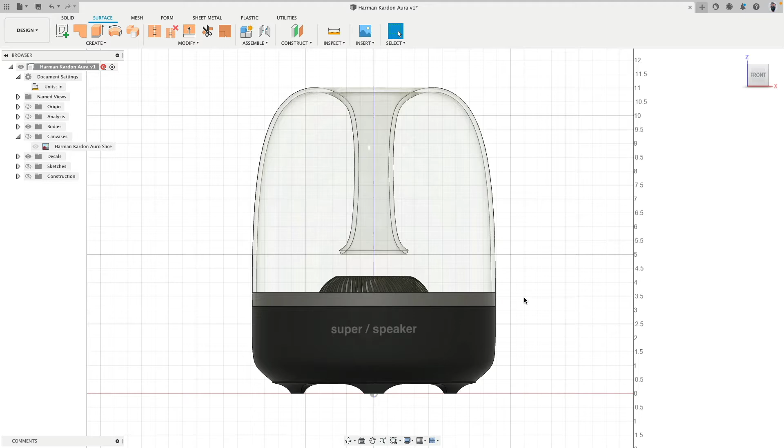Hello everybody, and welcome to this amazing exercise in which we're going to create this super speaker Wi-Fi speaker. What's going to be interesting in this lecture is how we're creating just a concept model.

Concept model, what does that mean? Here, there's nothing inside, it's just a paper model. Everything we create here is kind of like a sketch on paper, just an idea of the shape without all the interior stuff in it.

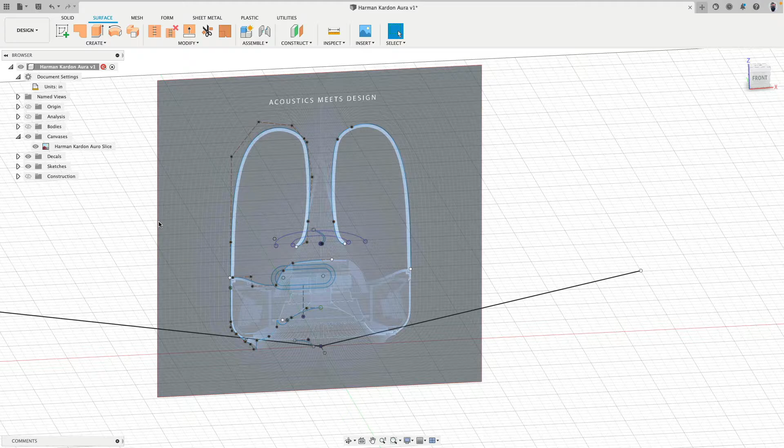The way we will start and work is by bringing in first a canvas, scaling it, creating then just only the sketches we need. And then I will show you an interesting mix of surface and solid modeling techniques to create all the details we have here. For example, this stuff here in the center looks highly detailed.

That's actually easy peasy kindergarten stuff. My 5-year-old could do this. Okay, so with all that said, let's do it.

So we start with a new scene. Also here, right click, turn off the design history. Millimeters we keep, very good. And then let's go to canvas.

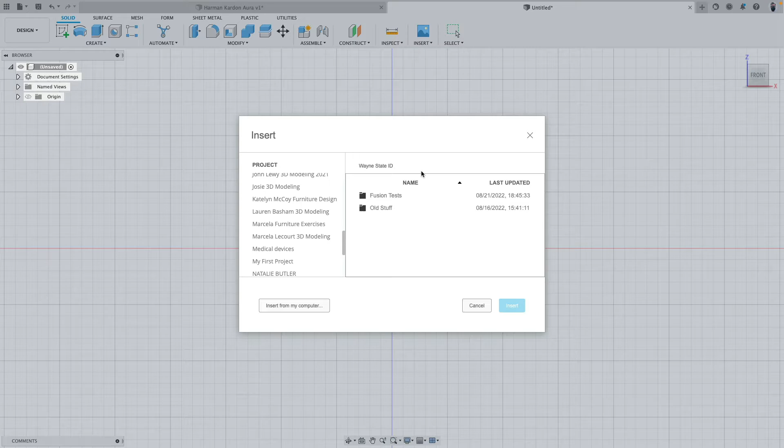The download link for the image is inside the description of the video. I have this here, there it is, bring this one in. Found it on Behance, thank you for the person who provided it. And there we are, okay, good.

Now from the bottom to the top, that should be around 11 inches.

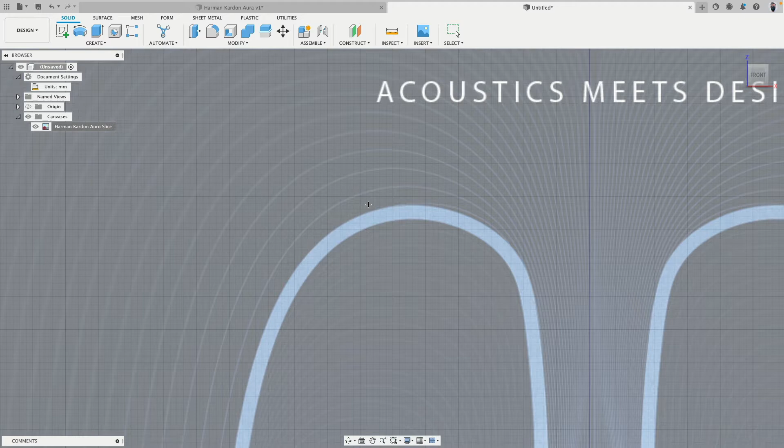Before I continue, you see I'm in millimeters right now. Doesn't matter actually much, you can go to calibrate. Then here on this grid line that makes sense, it's easy to follow. Then I go up. So roughly here, there, 11 inches.

Fusion is then converting inches into millimeters for me. Right click, edit canvas, move this to wherever.

And then we try to center this, trying to find an object that's not too big, easy to center, kind of like this piece here. And I'm using the grid to eyeball this.

Very good, we're not making a manufacturing model of this. We're just using this to study how to surface. Cool, okay, there is the sketch.

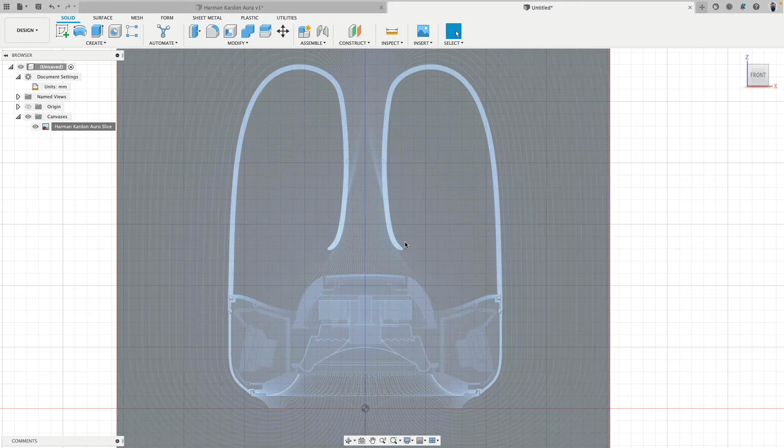Now again, this is going to be a concept model. This is not a manufacturing model. All the speakers and the inside and how all these parts are connected, we don't create.

Specifically at the beginning of when you design a product, everything that goes inside is not yet really that important. I mean, you know what should go in, but you're more concerned about the styling of the outside, the look, the feel, the interaction, the proportions, and then we put all the electronics in and hope everything fits.

So what we can do is identify easy to redraw lines. Let's start actually with this piece. So we'll learn a lot about sketching today in this exercise too.

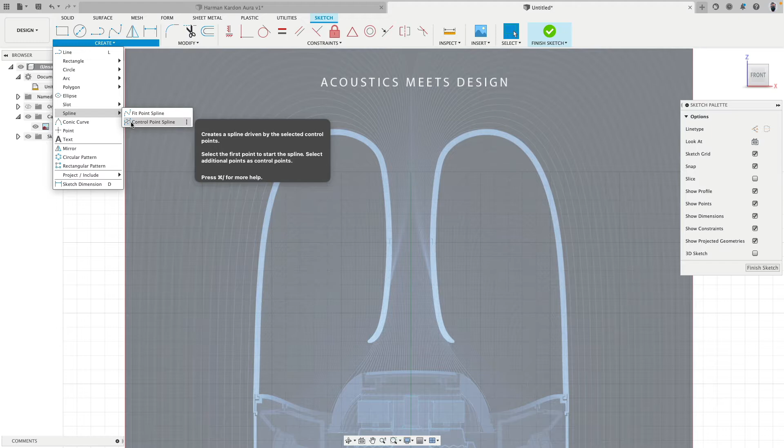So a new sketch on this view, and then we will go to the spline control point and start somewhere here. Click, and I know I need another point there. And I'm paying attention to how this curve grows. There seems to be a kink.

Then I need one here, I need one there, one there, one there. And then here it stops. Okay, good.

Do I know if all these points are correct? I have no idea, I might have to move these around. And in case the prediction is not correct, I might have to redraw this spline. So keep that in mind.

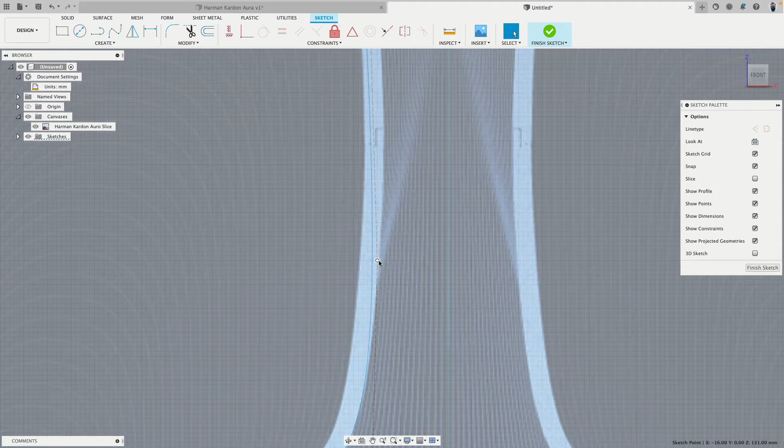What we can do now is, you see with all these points, I can select, regroup, position them, and then start massaging the curve to kind of like following this outline. When points get close together, I can start pinching a curve, by the way. If points get further away, I'm flattening a curve.

Here, these two points I want to be vertical. I can select the control polygon or the control cage line, make that one vertical, and then these points are always vertical. That's important for tangency.

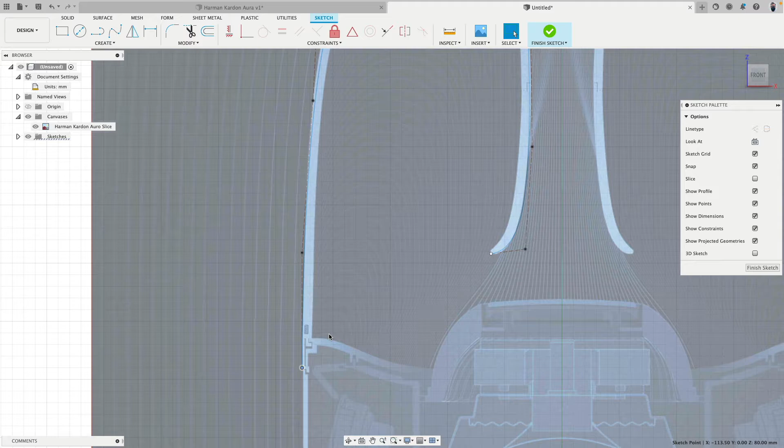Tangency because, woo, how this one flows down should continue flowing into the bottom. This point actually is good, so I lock it. I don't want this to move anymore.

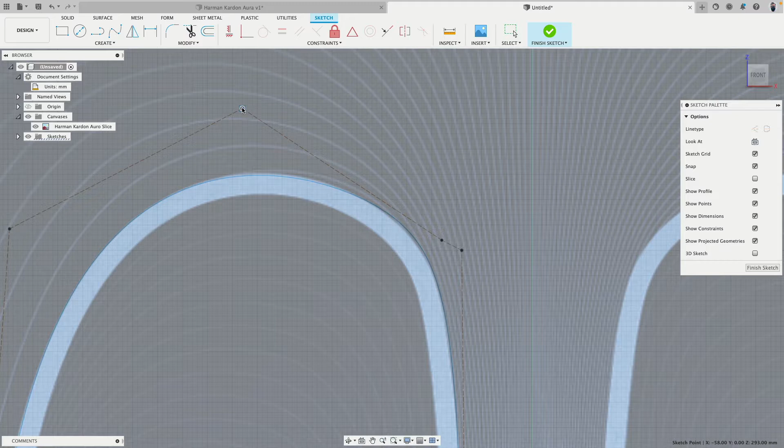And now I'm simply scrolling around, trying to see what else can I do here. This is not really possible to, with the few points I have here, to super well rebuild the shape, but yeah, I think we can say I got pretty close. Yeah, there.

Okay, let me show you something interesting. So right click on the spline. Nope, that's not the menu I want. One more time. Right click on the spline. Toggle curvature display. Yeah, what's this? No?

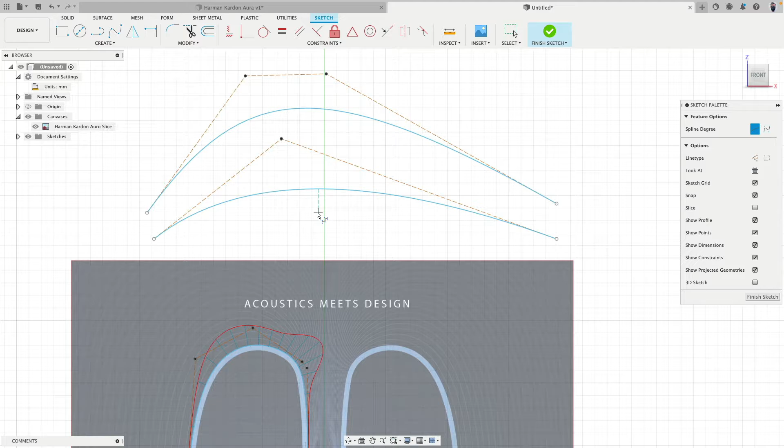Let me go back. And I create another spline here, there, there, and there. You see how this is very long? Here, 2 points together. It bends quicker. When I just do 3 points, now it looks this way. And now I am going to be super silly. So, smart working, opposite working.

Right click, curvature graph. You see how crazy that is, and when I move 1 point, you see how the graph changes. The graph basically defines how quickly a surface bends. The more the red line is away from the spline, the more the curve bends. See, when I get this closer or flat, if I make this all flat, there you can see how I get these divots out.

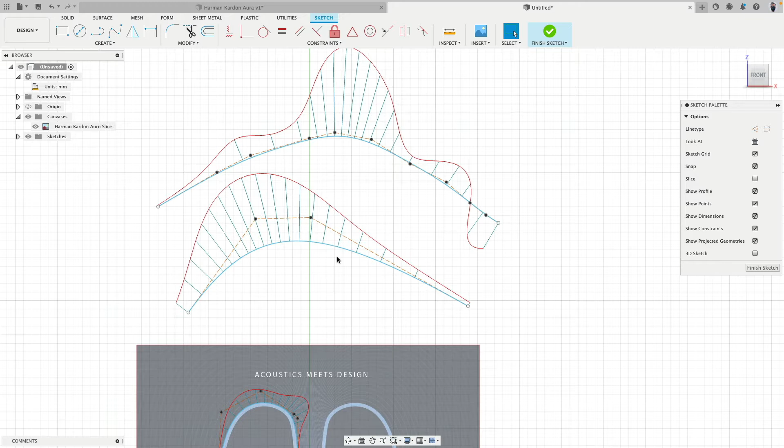Here, for example, I only have 4 points. Oh, look how smooth this is. And 3 points. Yeah. You can see this. What I'm trying to show you is, if you pay attention to the red graph, you can see that the lower line is nice and smooth, and the other one has like way too much caffeine.

So that's also a very good point: too many points is too much work and the surface later will be terrible. You want to work with the least amount of points to force the curve into the shape you want. Sometimes you need a few more points, but when I, for example, start removing these points, cleaning this up a little bit, you can start noticing how this can get actually more even. There.

But you see now it's still, for example, here this is very long. And here, because I have 1 extra point, and maybe at the start 2, I can in general have from the beginning already a nice curve. And here this is more linear, then it bends, and then it's linear. Okay, well, maybe I can remove 1 more point. Let's see. Yeah, it's also not too bad.

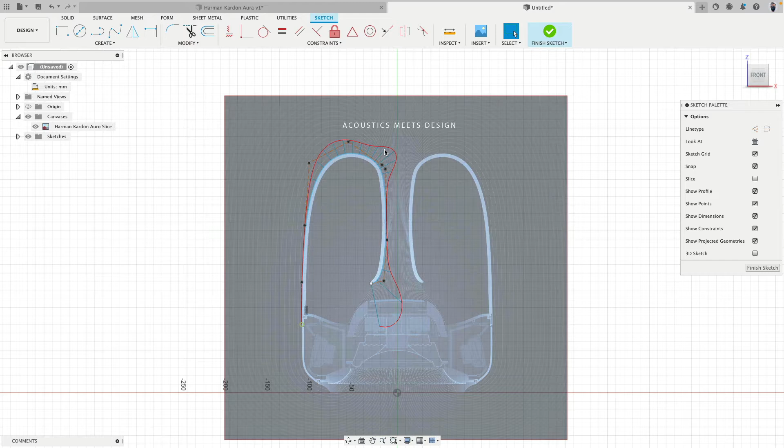Okay, good. So that's about how many points I have here. Is this necessary? So I could, with what I said, try to see, can I remove a few points and move this around? Yeah, you see this point I was able to remove. And now this looks actually pretty good. The rest, I think, I can't remove anymore. That's what I need. Okay, very good. Right click. Nope, one more time, right click, turn this off. Okay, so this part is done. Very good. Congratulations.

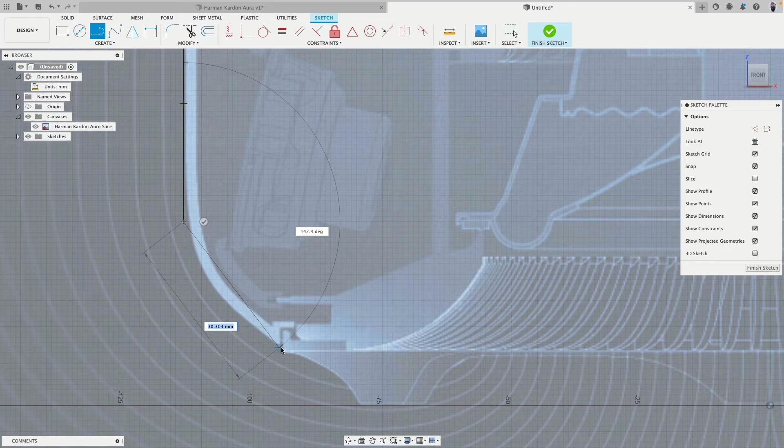Now, down here, one could say straight line down and then a line maybe to here. Okay, and then this point here with M, I move down there. Look at this. Okay, and then I can do a fillet. Yeah, but the surface this command would create is G1, is not very interesting and kind of terrible. So how can we rebuild this with a spline?

Start point, 1 point for tangency, 1 point for tangency, end point. And if you think I'm speaking a foreign language, that's okay. This might take a moment to understand what we are doing here. So this is the tangency. There's the next tangency, and there I stop. So I select this line, bring this to there, bring this to there. Yeah, what you see here from there already starts flowing down way too much.

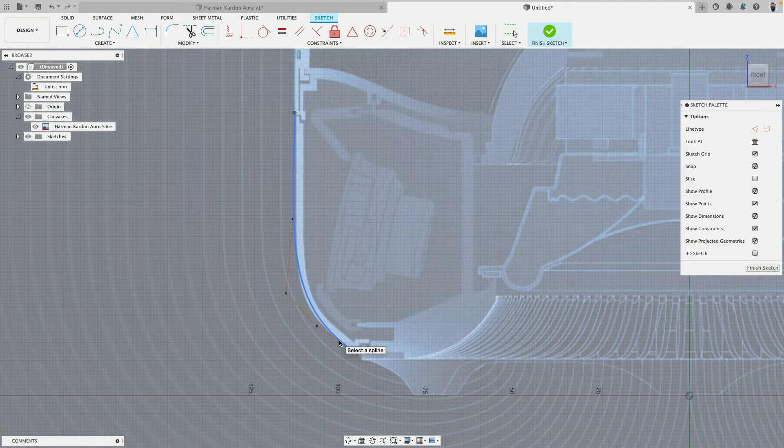So, right click, insert spline point, maybe there. I needed another control point. Yeah, and maybe I do the same here. Right click, insert spline point, maybe there. Okay, good. So, a little bit of cleanup.

These two lines I would like to be vertical. And then these two lines I would like to be parallel. Then this point I move to here. Fix it. And now, basically, when I move this point, you see how the midpoint, this is a straight line. And with this, I can control a straight line and a curve. And here, this is a top one. With this, I can bring this line down. And with this, then I talk about when that bend starts.

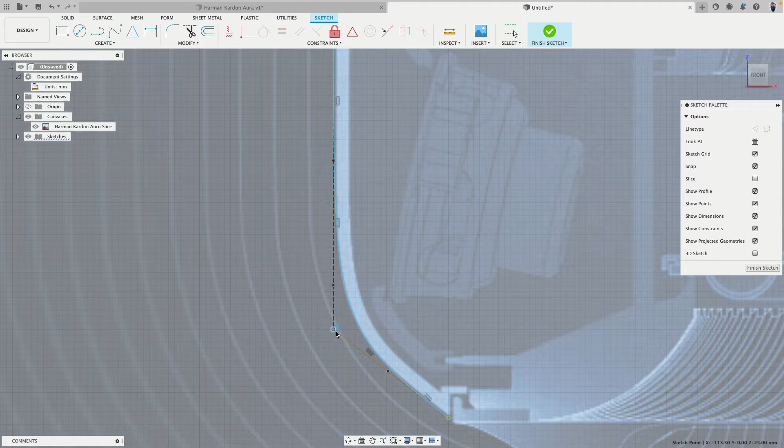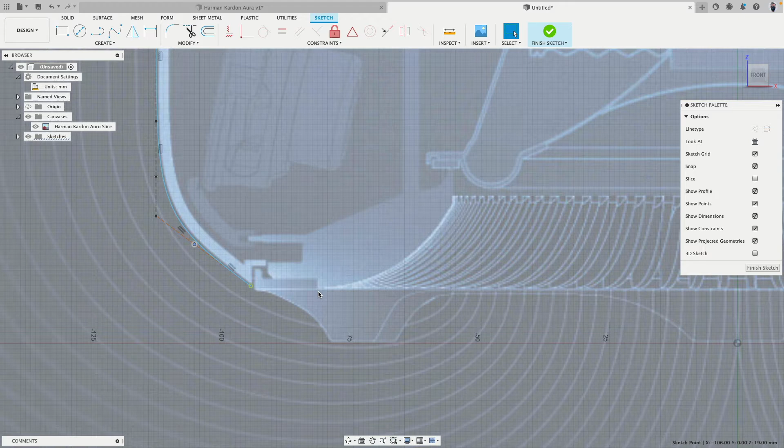Yeah, look at this, no? It's not 100% precise. Again, this is just an image, and everything I'm trying to show you here is actually how this surfacing works and working with curves and splines. Cool. Okay, so that's good. This is an interesting piece which we will deal with later, but for the moment I will do this in a simplified way. So maybe like this. Okay. And then here we have an arc that goes up.

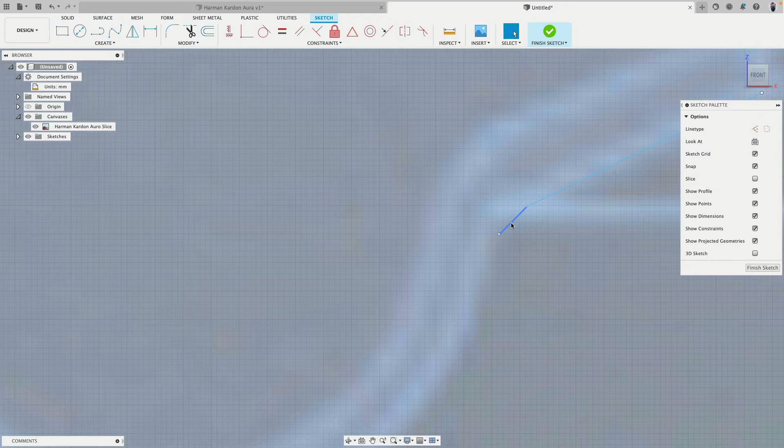I will use the fit point curve. I could have used an arc too, but I'm trying not to spend too much time on modeling this for you. And then we can here go up, go over. There is now an arc. So I will start putting a line down there. Sometimes Fusion creates artifacts. There was an artifact. And these points here I lock.

It's horizontal. And now to put in a perfect arc, point to point circle. Click, click there, and then trim, get rid of this. And now this arc is tangent, not tangent, it's 90 degrees here. No? So perfect. Things that I want to move is, for example, this point here.

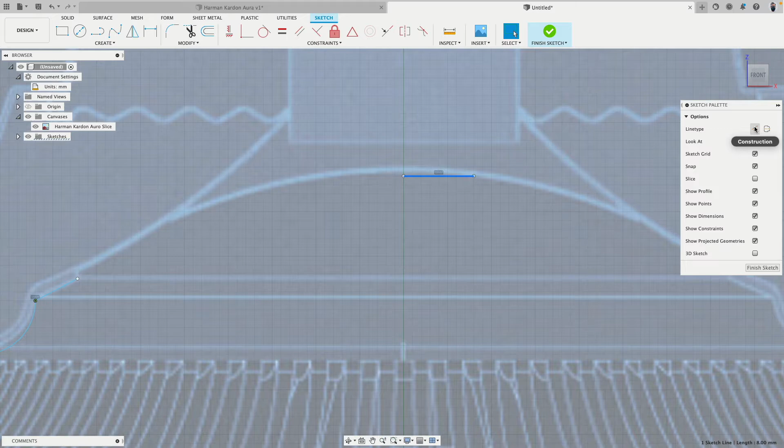And now here we have a nice dome. Let me show you how we can model a dome that is only half built. This is a construction line. Lock it and make construction line. Then we go to control point, click, tangency point, and click.

And now we can say tangency, and point, pay attention to this point, tangency to there. So when I move this point, you see how this vertex goes, and you see how they're connected. So now I can sculpt my curve quite nicely. And when this rotates over or mirrors over, it perfectly continues.

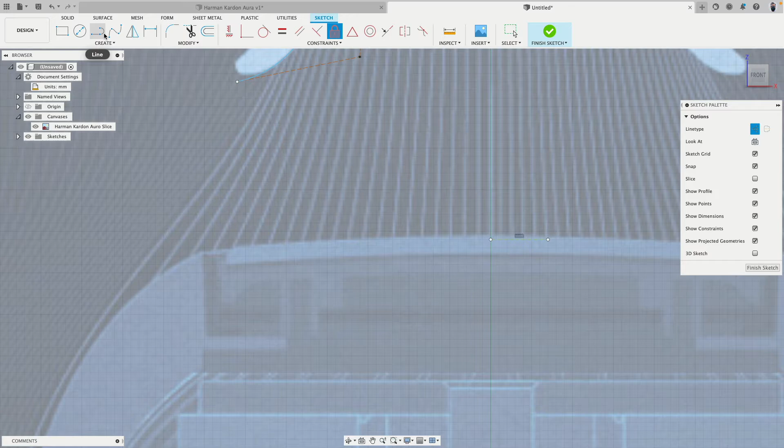Well, we made really good headway. Perfect. Nice. This piece we did here. Let's do one more time, actually here. Roughly here I draw a line. This line lock and construction there. And then this time, for example, we can use an arc. Go to here, and then there's the arc.

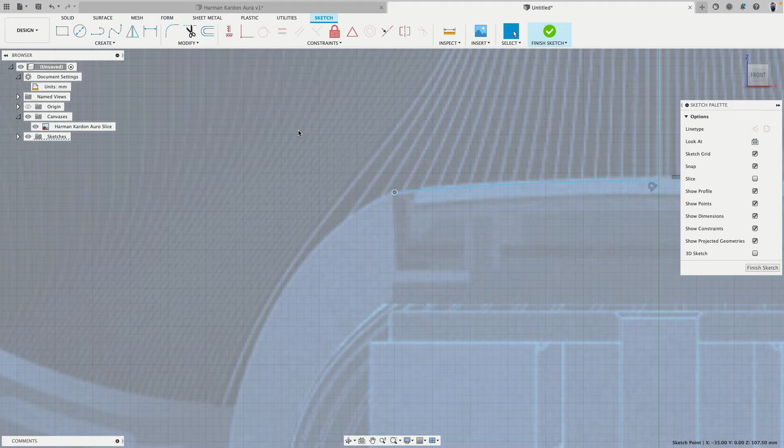So you see the arc is now tangent applied to that line, but should not be construction line there. Maybe a little bit up. Very good. Right click, curvature display. You see the arc is very even? Well, because it's a circle. And the line doesn't bend, so you wouldn't see anything. This point is good. Let's lock it. This point, I mean.

Then we have something that comes down here. We can easily do this with a fit point curve there. Oh, this is always turned on by default. There. And then we can move this around and try to make it match. It's a hard connection here, perfectly fine. Or if we want to make this a little bit nicer, here, this might be a good control point.

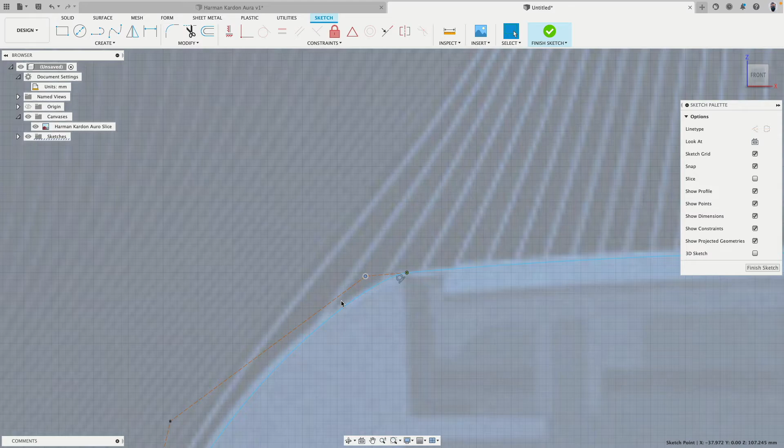Click, tangency point, curvature for moving it, and endpoint. So now tangency, so you go tangent to there. And you see now how there's a little flow. When we zoom in there, you can see it goes in. And then with this, we can sculpt this more nicely. Yeah, I like this more.

Cool. Here's an S shape. That's interesting too. Control point. What's really important is I'm actually building this kind of here. Click. Then I go horizontal. I go down and I go horizontal. I want this line and this line to be horizontally aligned. So when I move one point, you see it all adjusts evenly. There, look at this. There's our flow.

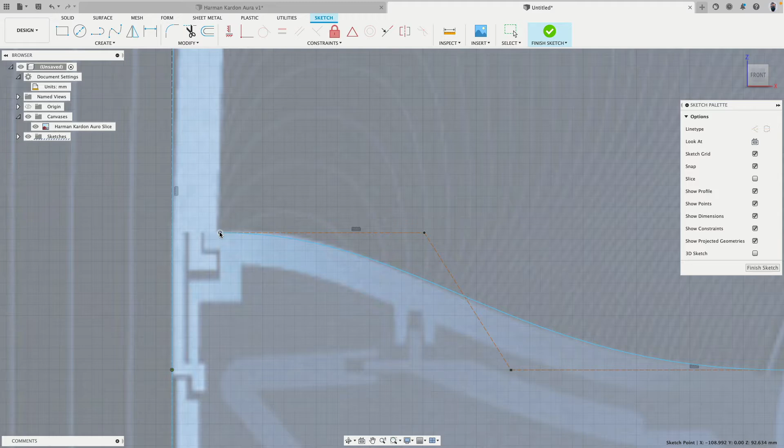Cool. Pretty good. We made really good headway with everything we have here. So this piece here we need to refine. We can select a line from here. This line maybe can go down at an angle like this, 3 millimeters in, and then we use a fit point, click, click to do an arc.

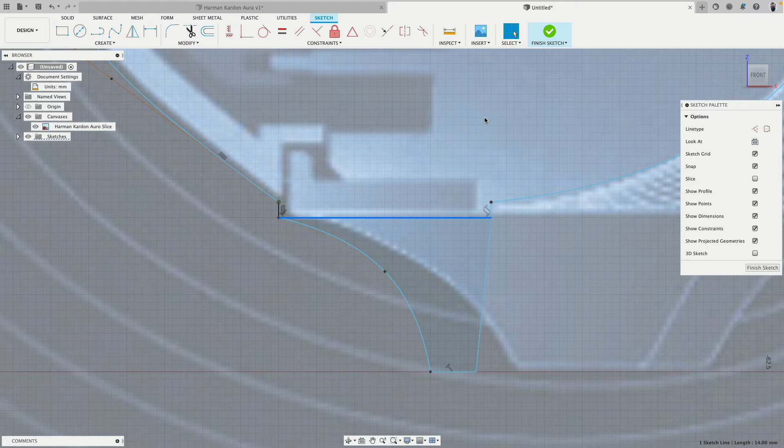I used the fit point curve to do arcs, which are not 100% a clean arc. These parts are a little bit faster, this bends more like a circle, and then this is faster. It's a matter of preference. This line here I delete, and then here we have this little dip and can say start point and end point horizontally. So we make sure that this line is equal.

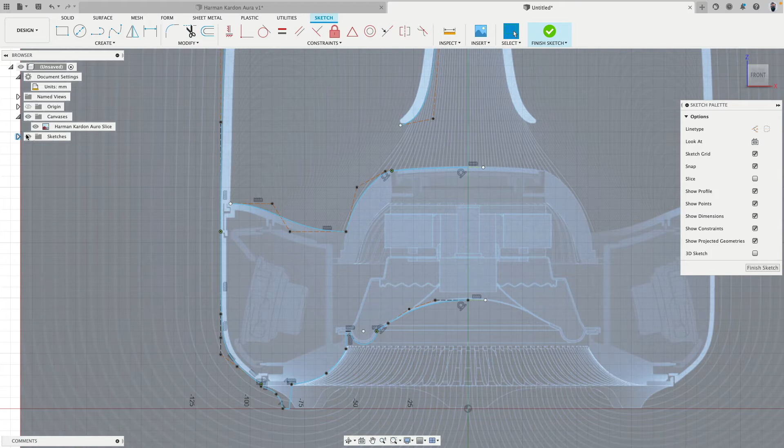Escape. Let's turn this off for the moment. That actually looks pretty good. So we can now go ahead and do some surface tests. So here's my Revolve command. And there's something going on here right now. When I click on this, everything is selected, but chaining is turned off. Normally with chaining off, only one piece is selected. In case somebody sees this video and this bug is fixed, there you have it.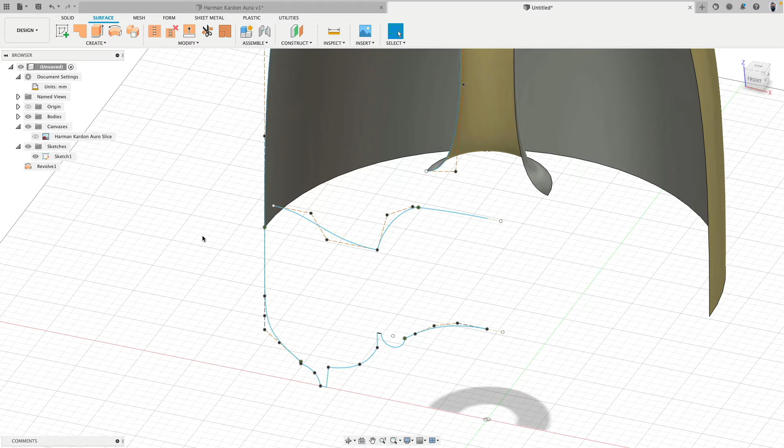So axis, here's the axis, and now we can do a revolve. And I'm on purpose going 180 degrees, so I can look into the piece. That's pretty cool. Okay, that works. So let's continue. Sweep. Nope, not sweep, sorry.

Revolve. I am in this case now selecting this, and this. Let's say that is the speaker, the membrane, 360, perfect. Repeat. There and there, and then I select this one, axis, there, very good. You might ask yourself, why didn't you do this one? I will come to that in a moment.

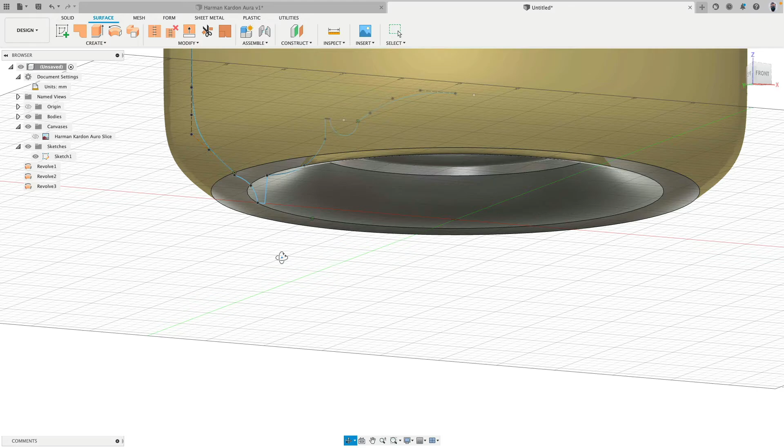Then this and this. Actually, I can select all three at the same time. 360. Okay, good. I did all those 360 because that's what I want to see. This one I kept half, so you can see inside.

So this surface here, we don't need anymore. Let's go revolve you along the z-axis 360. Thank you. And now we're going to give this a material thickness. Inside 4 millimeters. Very good.

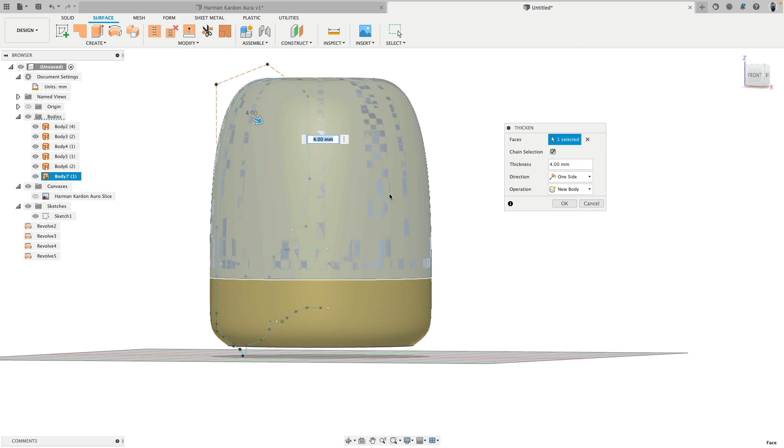We can't really see inside, so let's turn on section analysis on this plane. We might have to flip it. There we are. Yeah, it went to the inside. Very good. Thank you. Very nice. Okay.

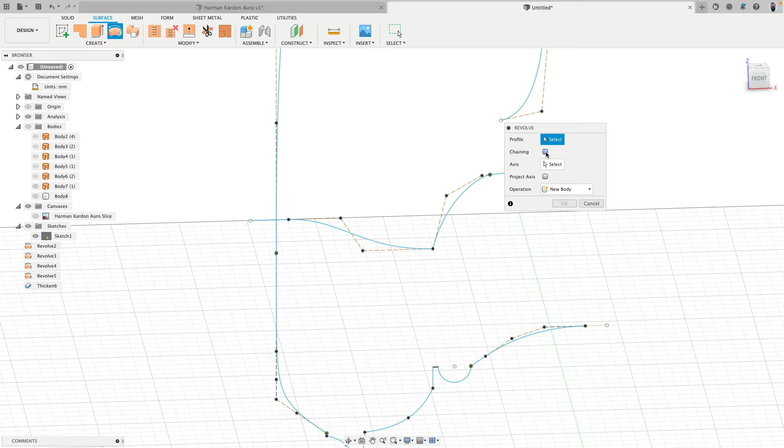This is actually too tall, and we might have to split this. Turning off all my surfaces, right click, edit this sketch, and from here I'm going to build a new line. Now this is a helper line. I will revolve just this piece. Yeah, there will be an error, all okay, because the bodies are invisible. There we are.

Okay, so this surface I can use to split. So body to split by this surface. Thank you. This can go. And now there's my lower part. There's my upper part. This piece does actually not touch it. Oh no, I didn't model accurately in the sketch. Yeah, it's okay. That's a cool thing what I'm showing you in this video about surface modeling.

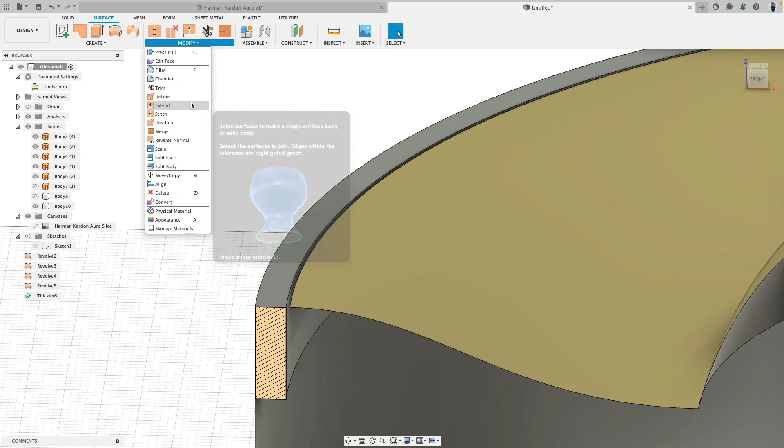We can extend the surface a little bit. There. I don't really know how much, maybe. Could be there. I go to there. Thank you. Now, I will go and say trim, and I will select this inner face of this solid, and then I click on this extra piece that sticks out. And okay. And the red piece now is gone. So we selected this face and decided, hey, be like a scissor, like a cookie cutter, and cut the outside away. And that was it. Quite simple.

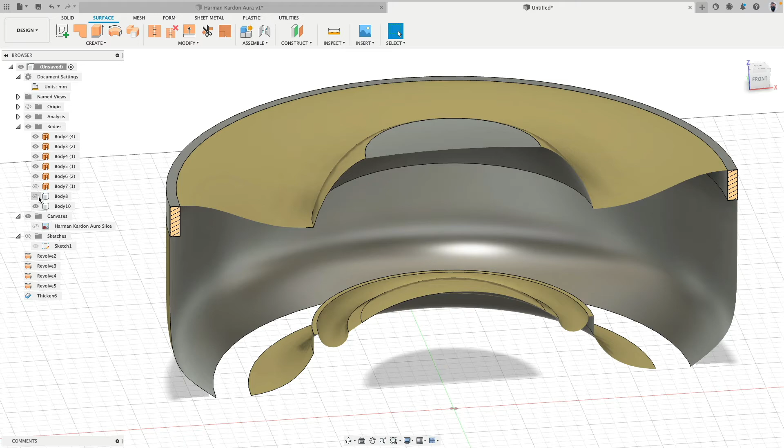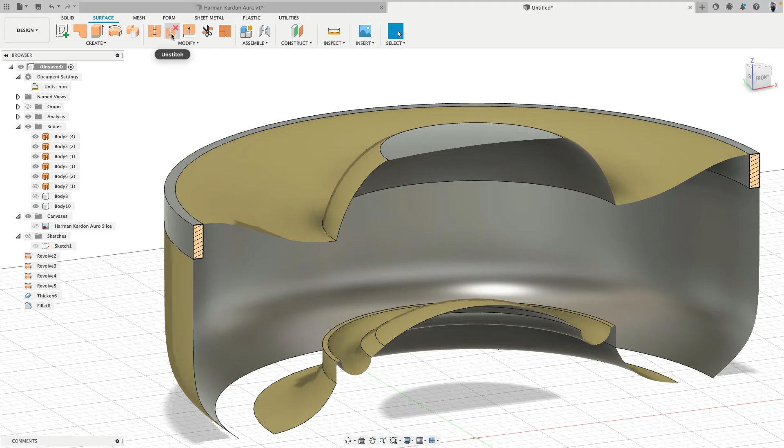Well, what else can we do now that's easy? So that is done. We could, for example, to be really done here and here. 2 millimeter, okay, 1 millimeter. Now we round this there. So the subwoofer, that is finished. This piece, yeah. So we have this unstitch, unstitch, unstitch, unstitch. Very good. So then this piece is alone. And what I will do now is you and you stitch together into one piece.

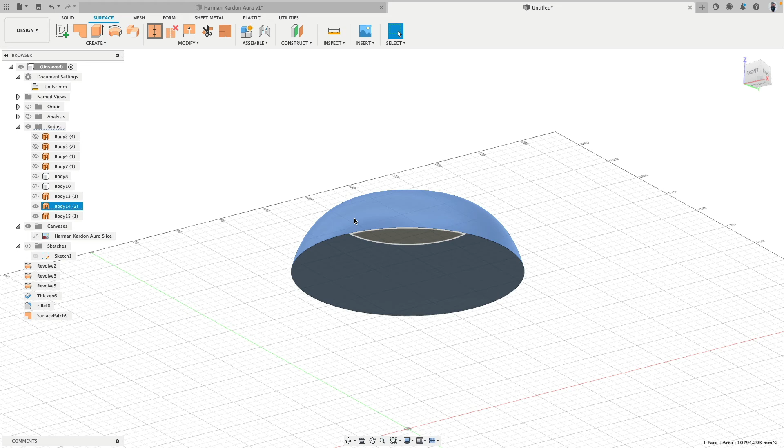By the way, everything that's gold here should be silver. So I do this with the reverse normal command. Cool. Okay. That piece I want. So gone, gone, gone, gone, and gone. And I turn analysis off. The bottom I will cap. Thank you. Then I will stitch this together. And then the bottom I will extend a little bit. Okay, now check this out.

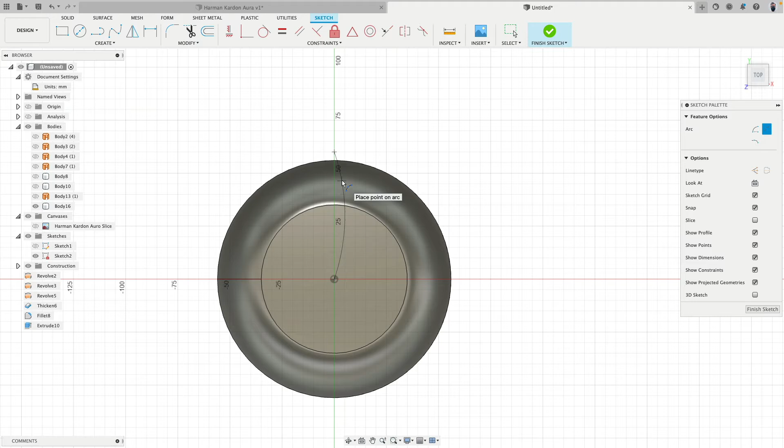I will create myself a construction plane from the bottom a little bit above, -50 in this case. New sketch on this. Turn this one off so we don't see this. And there's now my center. I will go and select my arc tool, and then I don't know, maybe I could also maybe do this from here. Yeah, let's see. Okay, yeah, maybe like this, who knows. 2 millimeters. Okay, very good. Thank you.

Then I will go ahead and say, please project this edge in and this edge in. Thank you. Cool. So what can we do now? Fun stuff. We will now select this and extrude it into the body. How far, how deep, no idea. Just eyeball it, do what I do. Again, this is just a paper model.

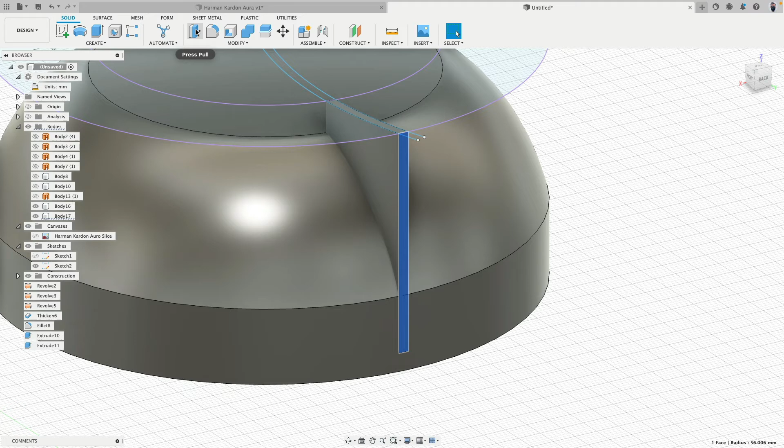This face we're going now to push back by 1 millimeter. So looks like 55. Yeah. And then here, that face we push back or push inwards, so 36 millimeters. Very good. You notice now that we actually switched from surface modeling to solid modeling.

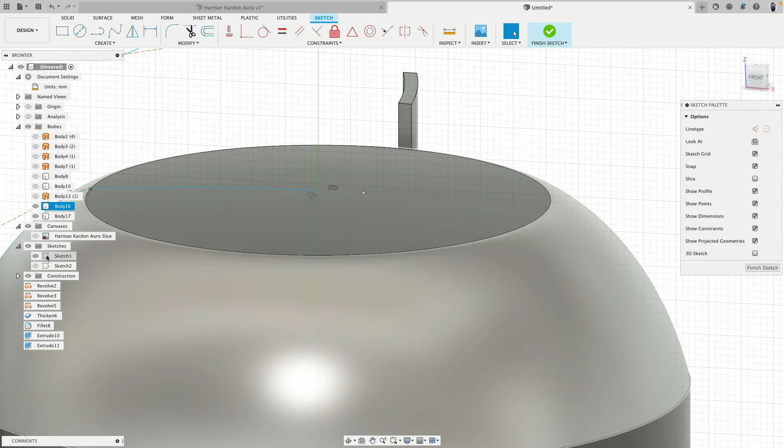Oh, what is going on there? This is terrible. Wow. This thing here shouldn't be there. So let me do one check. Yeah, it is tangent. So this arc is tangent to here, so it should be good. This pointy highlight feels like there's a pinch. Anyway, let's ignore it.

Solid piece is done. Now I want to make all these other pieces by hand. Of course not, that would be insane. We just select the circular pattern tool. 60 patterns, please. Thank you. And then the browser is blowing up. It's okay. We select then the base, go to the side view. Yeah, right to left click. Do not keep tools, click OK.

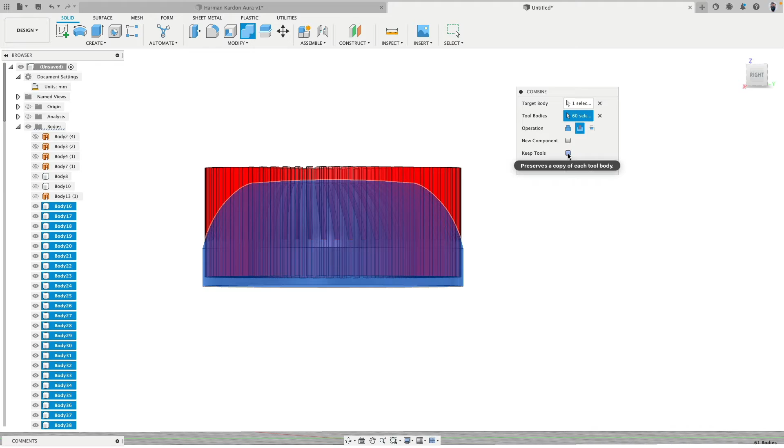Bonk. There. See? I mean, this is not exactly the piece that I have in the design, but with this exercise, I wanted to show you how we can create these structures. Via surface modeling, that would be a pain in the you-know-what. And with solid modeling, that was super easy. So, surface modeling. Yeah, well, we can delete these faces we don't need by simply pressing delete.

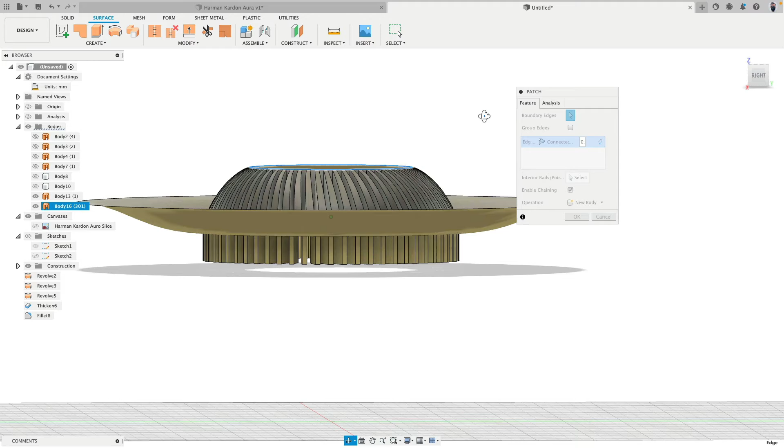Ta-da! Yeah, cool. I want to try something out. I delete this, then I go to patch, click this, say patch, and I will set this to G2 or G1. I go with G1. You see actually that it nicely domed it. So basically it came with this curvature and then it continued it. I like this one more. Okay, you're cool. You can stay. Good. Done.

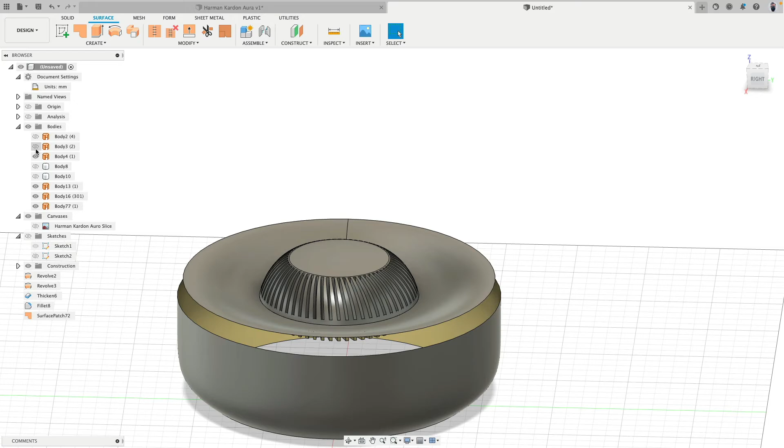What is this? We don't need this anymore, I think. Yeah. This is finished. Yeah, the feet.

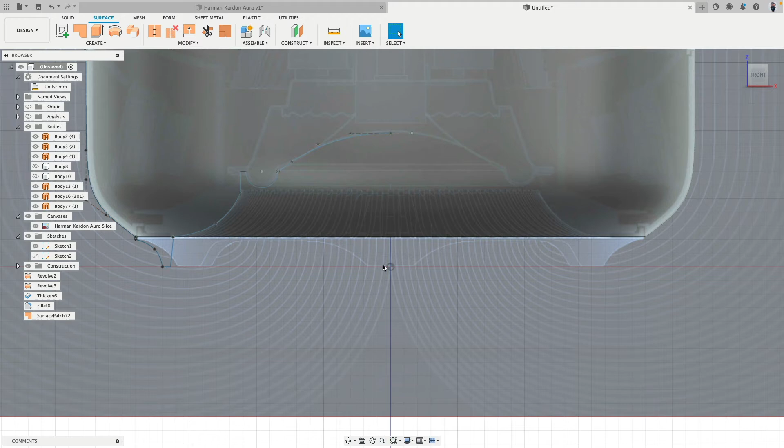To the sketch. This is going to be an interesting challenge now. So I sketched something here because I have the speaker. And you see, it's not really matching it. But again, very, very simple design actually to solve. You see here, we see actually the side view. So in sketch 1, I will go back. Then here is a horizontal line.

Okay, thank you. And then spline point, click horizontal and down. Okay, so you see I built a little bit over. Tangent, yeah, this is good. I then do not need anything else. So check out the rest, what I'm going to do now. This is actually really interesting. This piece, I extrude both sides really far. Okay, it's going to be a cutting tool.

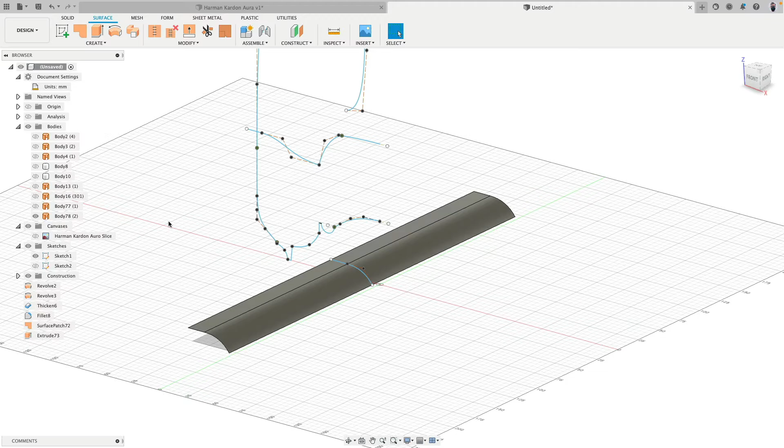Then I have now here my leg. So that segment I would like to revolve, this one, please. Axis here, but not 360. There are 3 feet, so 120. There we are. Okay. This whole thing, however, needs to be centered here. So 120 divided by 2.

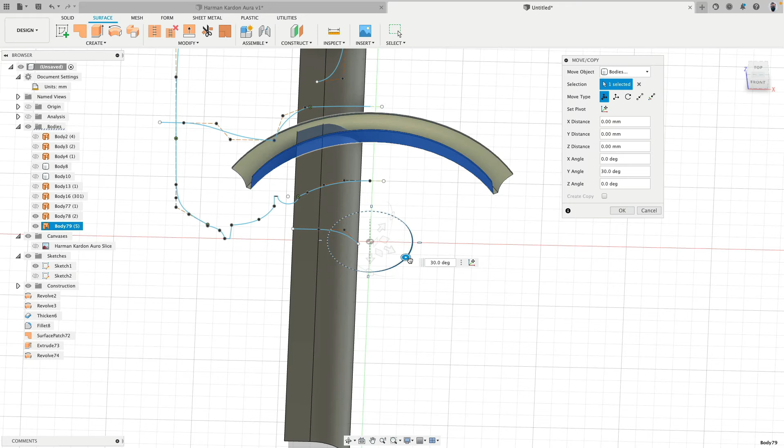No, so reposition the rotation to there. Click, click, done. And then you can see at what point is this centered. Looks like at 30 degrees. Yeah, so not 60, 30. Yeah. Good, I'm not teaching math. Then you see this line is slightly under this line. That's perfect. So we can do trimming now.

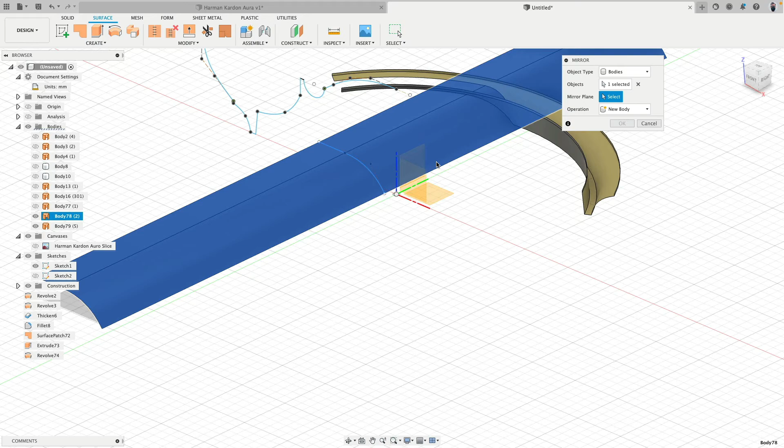So let's go trim. This is our trim tool, and then click this. Woohoo! It cut it away. Pretty awesome, no? Yeah. How do we do the other side? So we can go ahead, mirror this body along this plane. So there I made a copy of my cutting tool. No, you are the cutting tool, and then there we cut this away. Very good.

Should something maybe not work, before we do the cut, we can also do an extend. So I'm just extending this. I have to do this here anyway. Why? Because I need to fill the space in here. No? So see this. When I click trim on this, click this. Yeah, something doesn't really work. Yeah, what do we do?

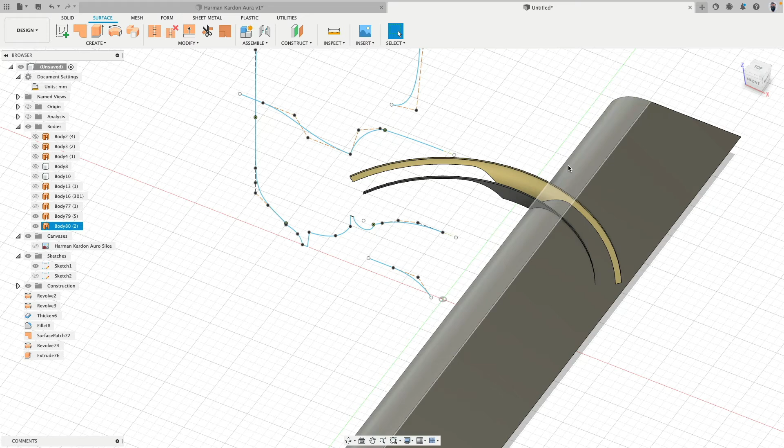Essentially, all I want is just cut along here and then cut along this three-dimensional edge, but I don't have anything here. So I can create this. Bottom view. New sketch, there. Then from the center, one line. And another line. And a center line. And be careful about all these little Fusion things. I drew too fast and Fusion cannot follow lines.

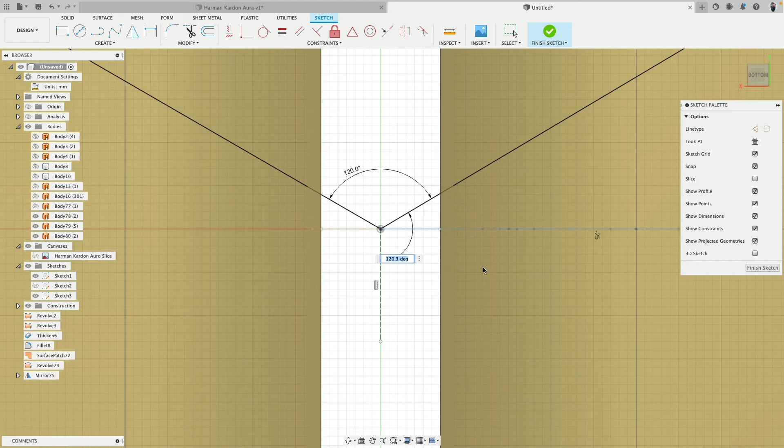X, construction line, these two will be what degree? Correct, 120, which, whoa, I nearly perfectly hit. And then 360 divided by 3, 120, this 2. So now we have 120 slices. Oh, look at this. It perfectly lines up. Man, do I like geometry. I guess that's why I got into industrial design. Chock, chock, chock, trim tool, boom, done, finished.

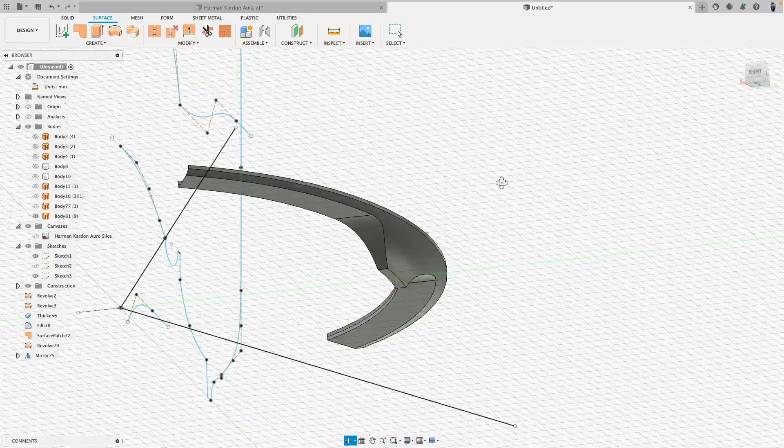Okay, now you see this is actually like mass production now. Trim, click, click, click, click. That's the beauty of surface modeling. Now, I learned this with Rhino for years till I got frustrated with Rhino being really weak at fillets, etc. Alias is also great, but you don't want to learn it. It's way too complicated. And this is actually super comfortable and easy.

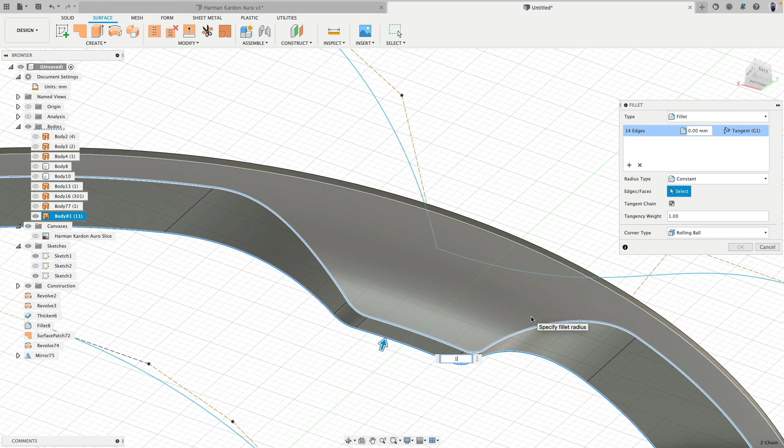We have some terrible edges there. So let's go to fillet. Now we can also fillet surfaces. No, it doesn't have to be solids. So the process pretty much is the same. That's the beauty of it. 0.5. Yeah, this looks better. The radius here changes in a really terrible way. So I will switch this to chord length. Now you can see there, it looks exactly the same way there. My name is Klaus Kuhnen and I approve this fillet. Cool. Okay.

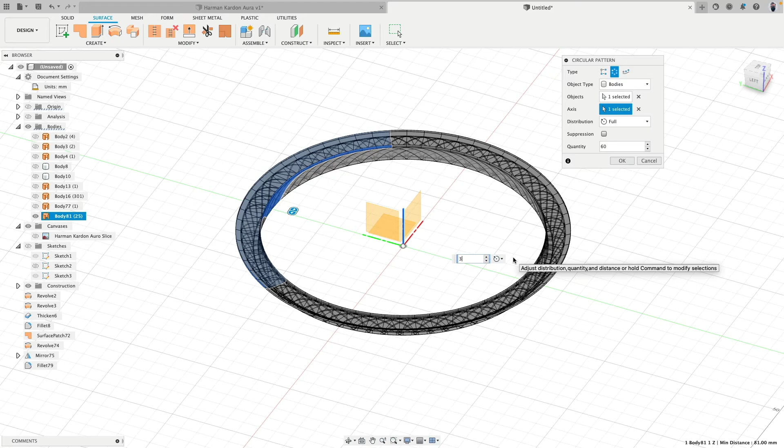Working smart, not hard. One of the biggest tips I can give you: we made one piece and now we use the pattern tool to not make 3, but 60. Ta-da! Look at this. Click, click, click. Join. You shall be married. There, there, there. Yeah, look at this. Pretty awesome. Where's our analysis? Here. No, that's actually pretty nice.

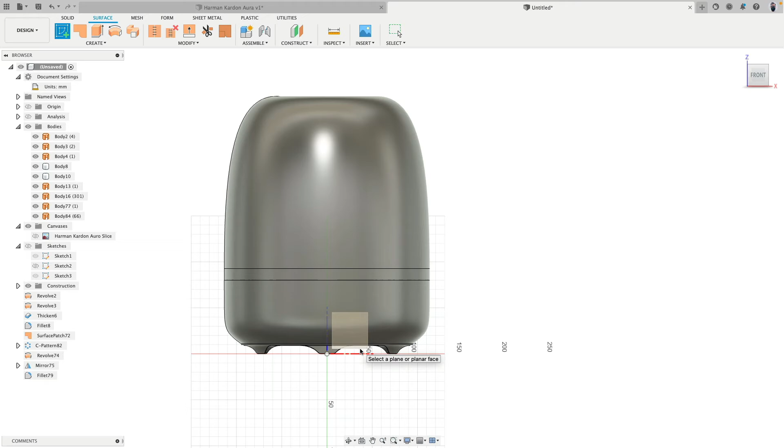So maybe the last piece is to add an interface element. So we will create a construction plane. Doesn't matter if you go front or back. I mean, technically speaking, it should be to the back. 120 is, yeah, in front of it. So new sketch on this one. There we are. And then here with a line command, click and drag, click and drag and close.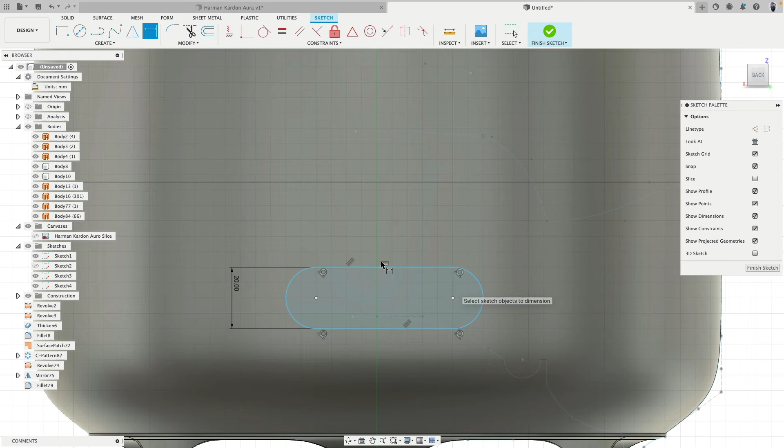Then we want to do the tangency. There we are. D for dimension. That's 20. Okay. Right click. Select the tangency command. 70. Okay. Height-wise, where is this positioned? Who knows? This is not that important, but what's important is here. We want this to be centered. You see how I drew a line?

X, vertical line to the midpoint. It's perpendicular, very good. So this piece is indeed now centered.

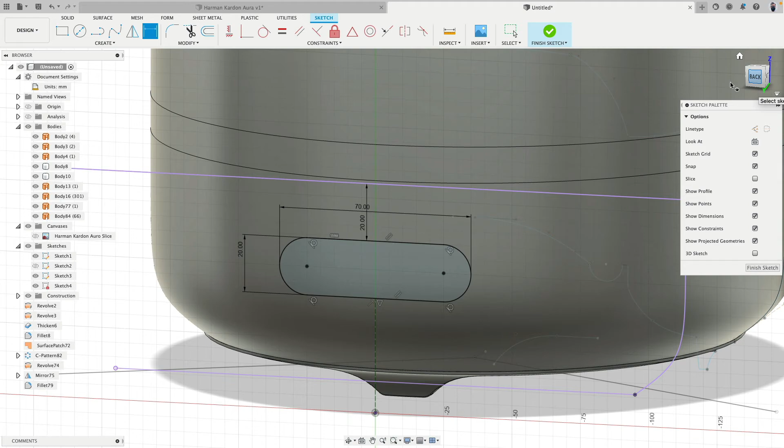I could now, if I want, project this arc into this sketch. And then with D, add a dimension, 15, let's say it should be 20 millimeters off this edge. Easy peasy. Cool. This bottom line we don't need anymore.

Beautiful. So what do we do with this thing? We would like to have a lip going around 5 millimeters. So, offset command, -5 in this case, to the outside.

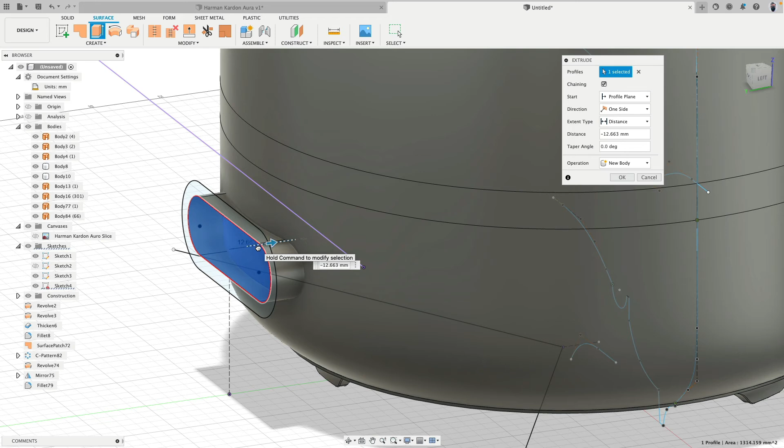Surface, extrude. This piece I would like to extrude as a surface. So 9 millimeters, then it touches it, 12, then it's really inside. Let's give this 5 more millimeters, so in my case, -17.

I'm just hiding everything what I don't really need. There we are. Cool. So, beautiful. So what can we do now?

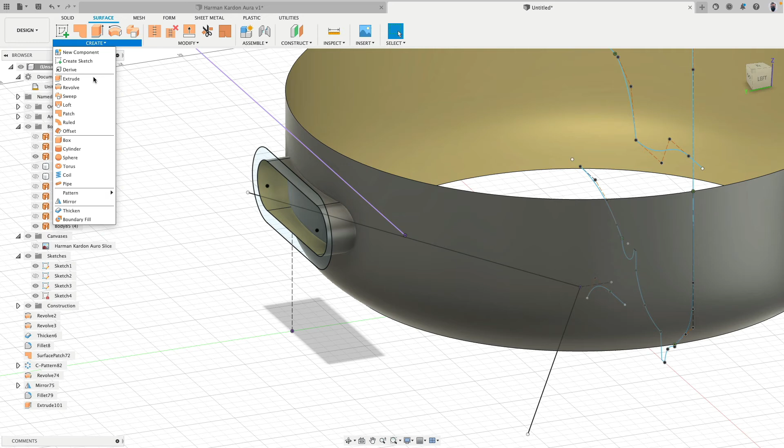So this whole piece should have a lip, which is trimmed by this. So what I'm going to do now is the following. I will do an offset of this surface by 2 millimeters, so it's bigger and easier to see. Very good. Then this body I hide for the moment.

And now, trim command. This surface trims this off. Trim command, the sketch trims this window here off. Trim command, the sketch trims the outside completely away.

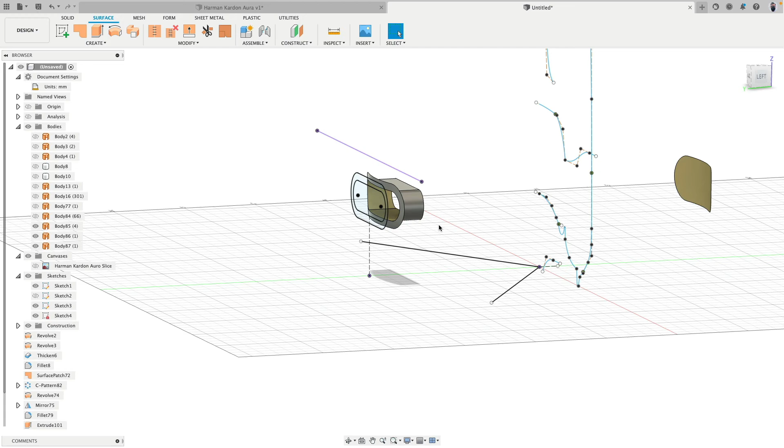Oh, you? Go get a coffee.

Then where is the rest? There's the rest. Okay, and then there you can see now how this sits in front. Very good. How do we fill this gap? Let me show you the best and clean way.

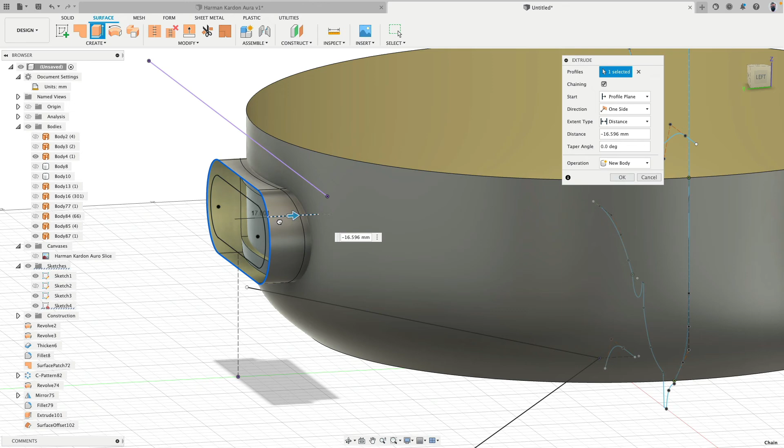So I'm extruding a new surface. Okay, then this cap cuts this. Right click, and this cuts this.

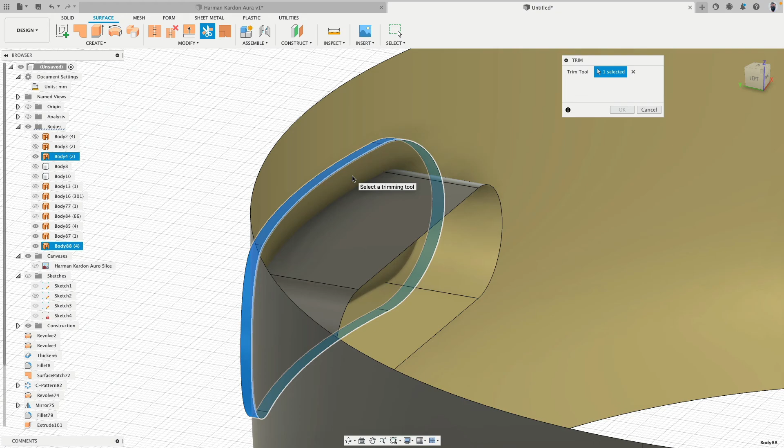So, and then trim, we say this piece trims this inside open. Yeah, look at that, now you see how we build actually these surfaces. Cool. I hope you, like with this exercise, started to see how elegant actually this method is.

Reverse, there. Patch. With patch we can fill this inside. Just a simple G0, so positional. Very good.

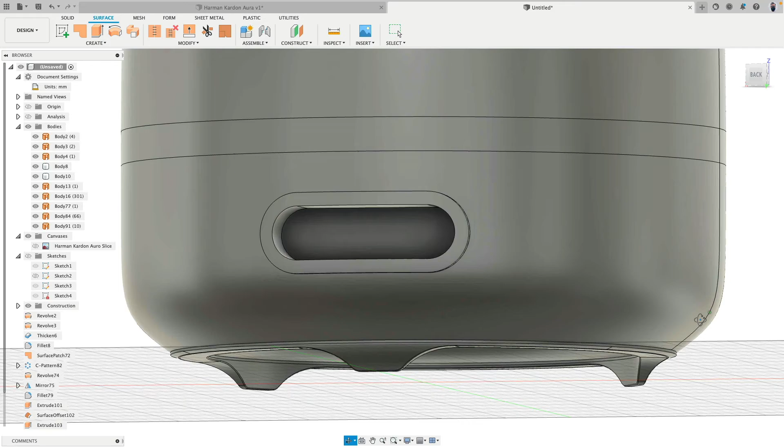You, I shall rule you. I'm a robot from space. No, no, no, no, no, no. You are a super speaker, and we shall give you materials now.

Okay, very good. So, to the materials. Before we do this, we can clean up all this feature nightmare here. Fusion Browser and direct modeling is really the best therapy for people with cleanup issues. It forces you to clean up.

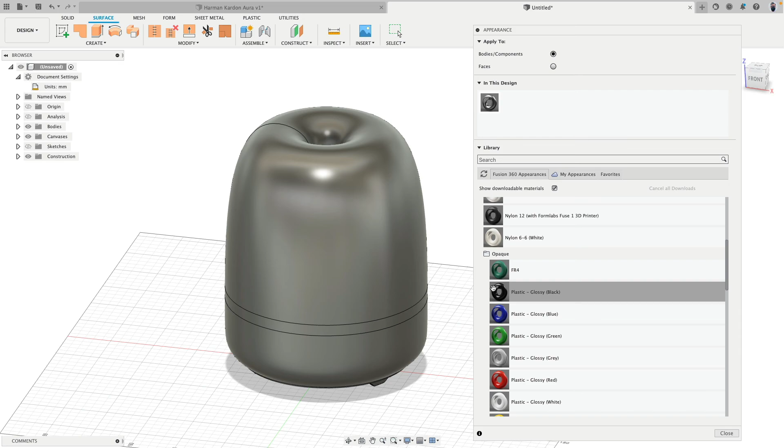So, press A for materials. What do we start with? Maybe we can go with plastic. And then I scroll down, opaque, and I have here a glossy. The glossy we might maybe use for this. Okay, good. And then we have a matte. We can use the matte for the rubber.

And here, this I hide for the moment. Then this I would like to be that glossy. This I would like to look like aluminum. So I go to metal, aluminum, maybe this brushed one there. This can be glossy, then this will be matte, more like a fabric.

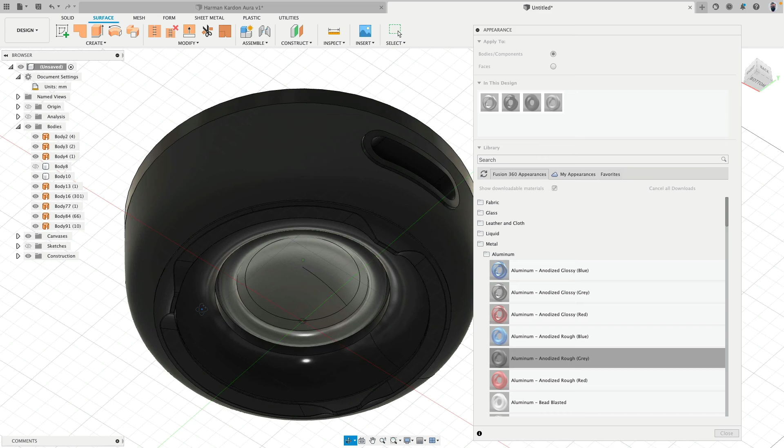Okay, very good. Oh, hello there. Glossy. Silicone. Now I see I'm not being super picky with the materials.

Fusion has a render engine built in. Well, don't use it. It's okay for screenshots, to be honest, actually quite good because you can work in one environment, model and take screenshots of the renderings, but it's not really that good for final renderings. It's not made for it. And that's also okay, that's why we have Blender.

Then let's go to plastic one more time, and then we will go to transparent. Close. Okay.

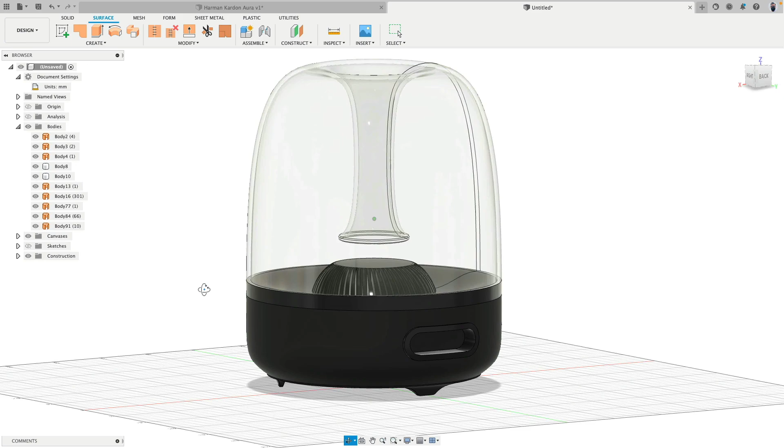The only thing that's now missing, for example, are interface elements. Now you could go Google the PNG with a transparent background, for example, of power on, Bluetooth, telephone, and loudness, lights, etc. What's really cool about this speaker is it has a light built in. And we have a logo here.

The logo and all these things we can put in as a decal. A decal is kind of like the term for sticker. There is my logo, super speaker. It wants a surface, there's the surface, and then I can rotate it. There you see, move this up and down, make this maybe smaller or bigger.

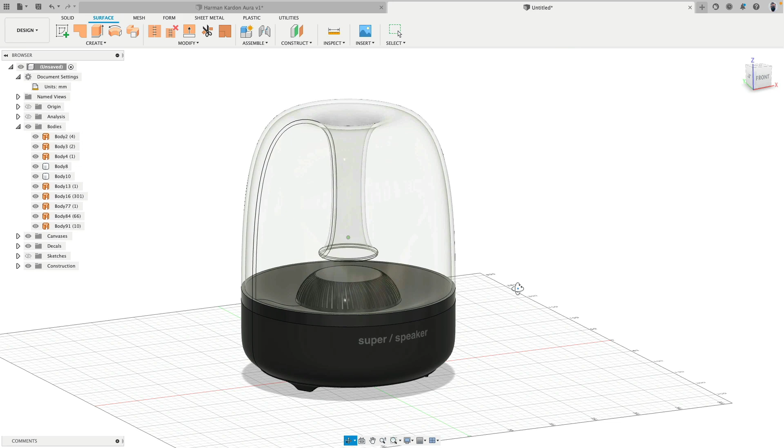The quality of the image, how many pixels you have is really important. Yeah, and there we have the super speaker Wi-Fi speaker that will soon light up during the night in a different video. Okay, that's it.